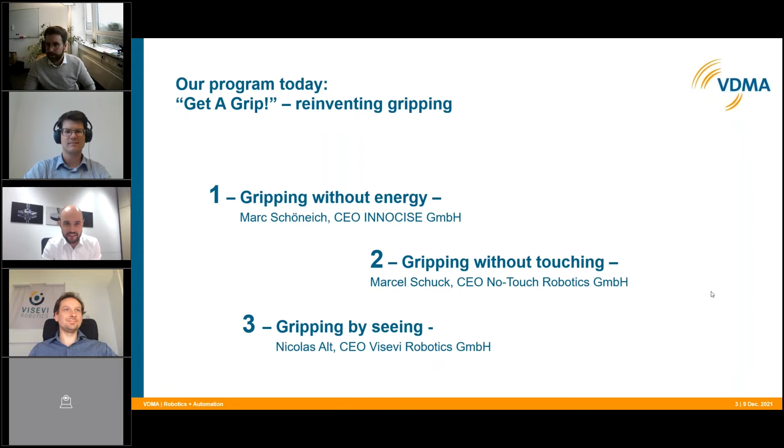Short introduction. My name is Marc Schöneich, CEO and founder of INNOCISE, and I'm quite happy to join my lunch with you today, and with a really nice topic, of course, gripping without some stuff and gripping with new stuff. So I thought about, when you speak about food like cheese, the new cheese is without any gluten, and it's without any palm oil, and it's without milk. So why not gripping without any energy and stuff like this? But of course with new features. I'm quite happy to share some insights with you today.

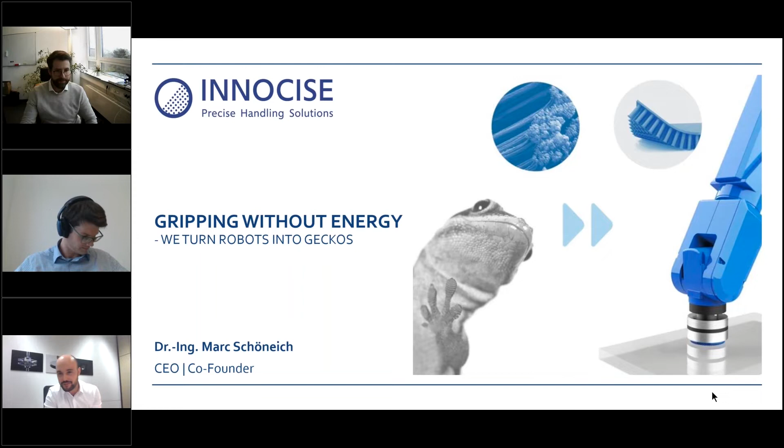Speaking about INNOCISE, we have gripping without any energy, and we turn robots into geckos. And when I'm eating lunch, I like to watch videos or sometimes read mails. I just want to share a video of what we are doing, to give you an insight into what's happening at INNOCISE. I hope this is working. I try to put the music behind. Just give me a sign if this is working. Okay, here you go.

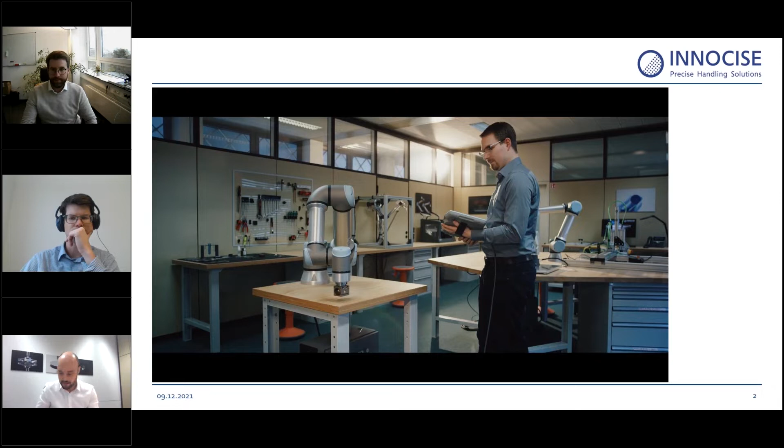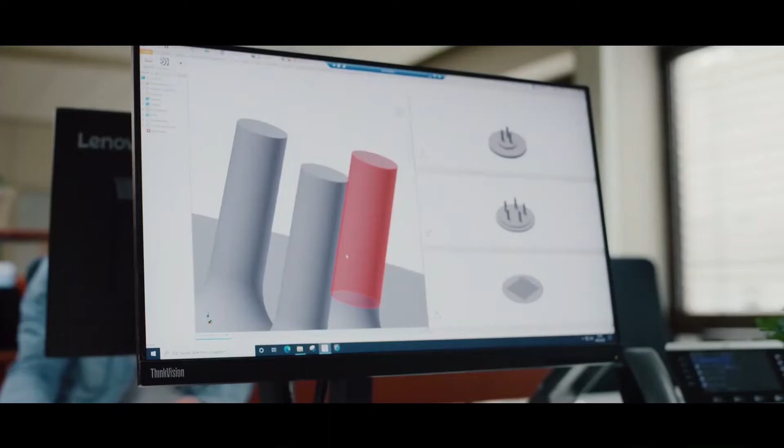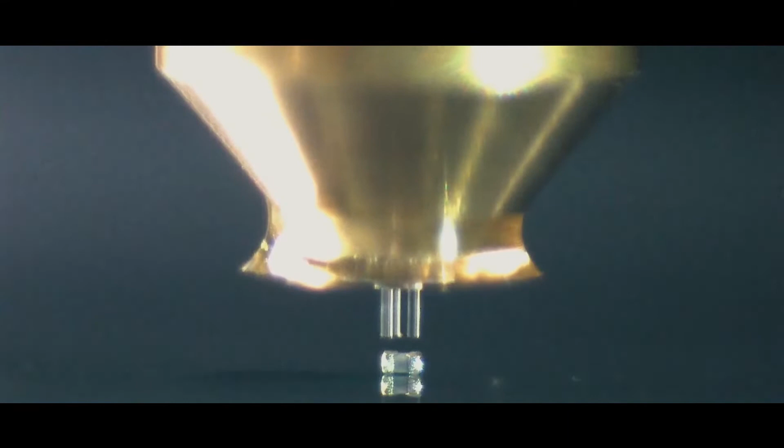We live in a world of materials. These materials appear in different forms, sizes, and shapes. At INNOCISE, we take on the challenge of handling the most sensitive, tiny, or demanding components. We develop gripping solutions to automate currently impossible or cost-intensive processes. More than 10 years of research at INM, Leibniz Institute for New Materials, built the foundation for Gecomer, a bio-inspired technology based on the function of gecko toes. Blending science and engineering, we move parts below 10 microns, pushing the limits of microassembly. Fast, precise, and sustainable. What applies to our team also applies to our technology.

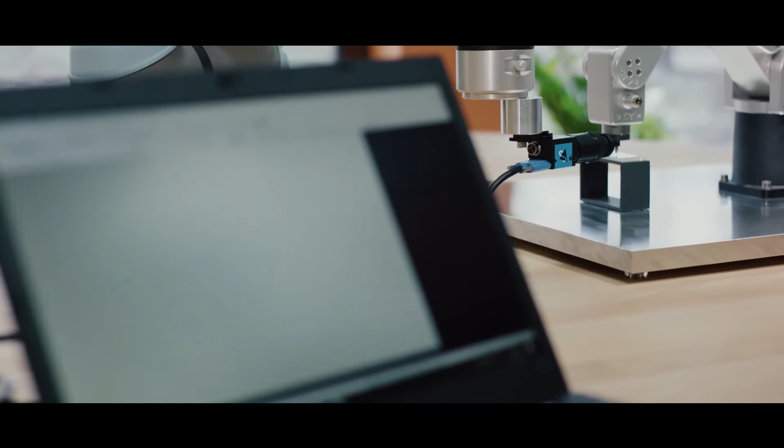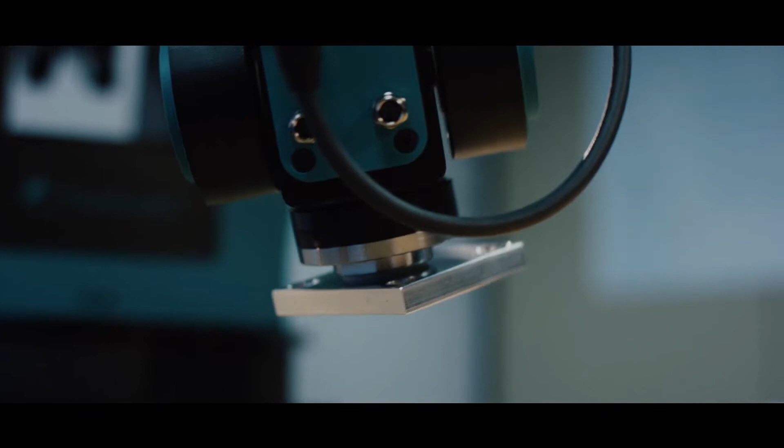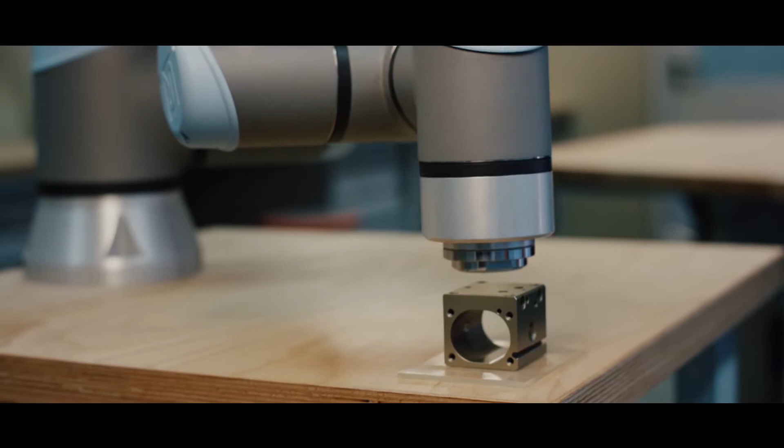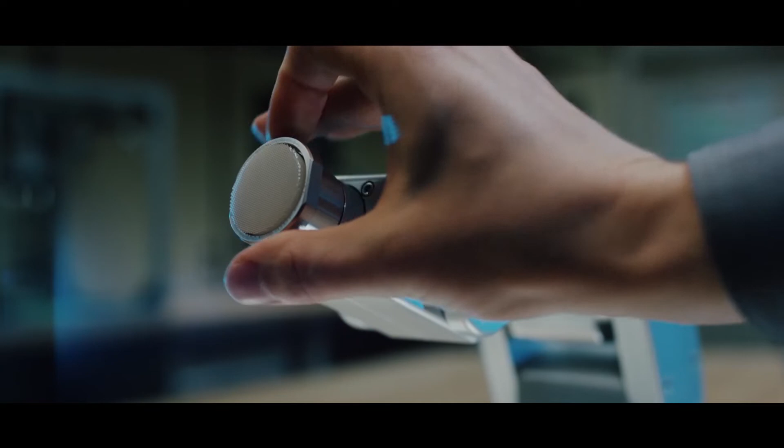Take a closer look. Our customers save valuable resources and costs as our grippers perform without external energy. We partner with well-known companies to combine innovative technologies with the highest industrial standards. This synergy brings a disruptive change to the handling of sensitive components. Easily adapted to different systems, the technology makes a key contribution to ecological, social, and economic progress. Once installed, the lightweight gripper operates noise-free, improving working conditions for collaborators. The structure increases quality and reduces scrap rate, as the flexible pillars do not leave any scratches or residues. Our specialists push the boundaries to best meet the market's needs. Based on physical van der Waals forces, attachment and detachment does not involve magnetism, chemical glue, or suction. The bio-inspired material paves the way for pick-and-place applications under extreme conditions, such as high temperatures or even vacuum. INNOCISE is the next step towards sustainable production.

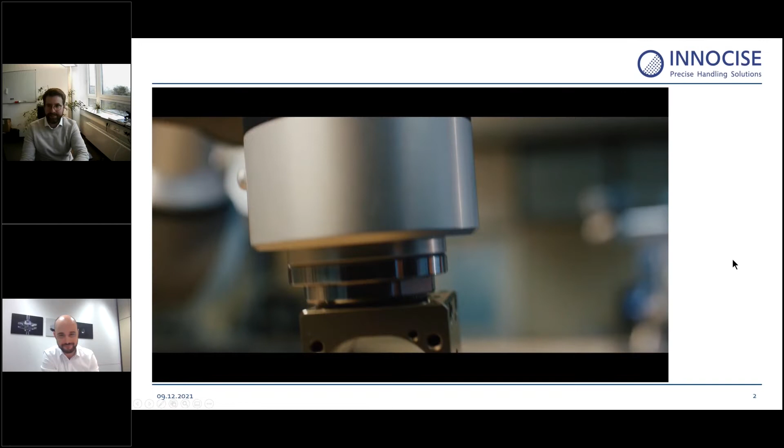So gripping without any energy, how does it work? You'll see it in the video a little bit. At Innocise, we are not building robots. We are not building grippers. We are building the fingertips of robots with grippers. So pick and place for us is working by microstructured polymers. We are experts in polymer technology and microstructures to create this adhesion force by using van der Waals interactions with about 1 kilogram per square centimeter, and we detach it in like a second. We can detach it with quite an easy detachment mechanism, like the gecko is doing as well.

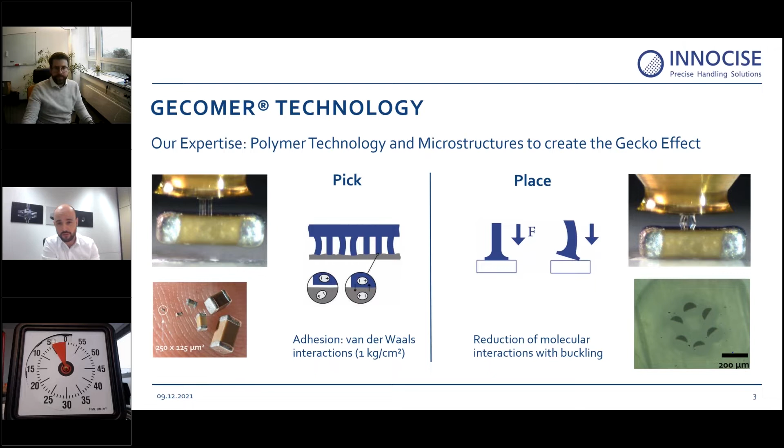I already showed this slide at the VDMA Maschinenbau-Gipfel in Berlin. So my motivation is, well, of course we can reduce suction grippers and stuff like this. But when we look at this modern production site for batteries, for example, our motivation is to rule out the entire blue cables here. So everything which is suction cups, stuff like this, is quite important for us, for a sustainable future regarding machine building and gripping, of course. And at the same time to challenge new environments for gripping, like automation opportunities in clean rooms or vacuum production as well. This is working from really small parts to square meters.

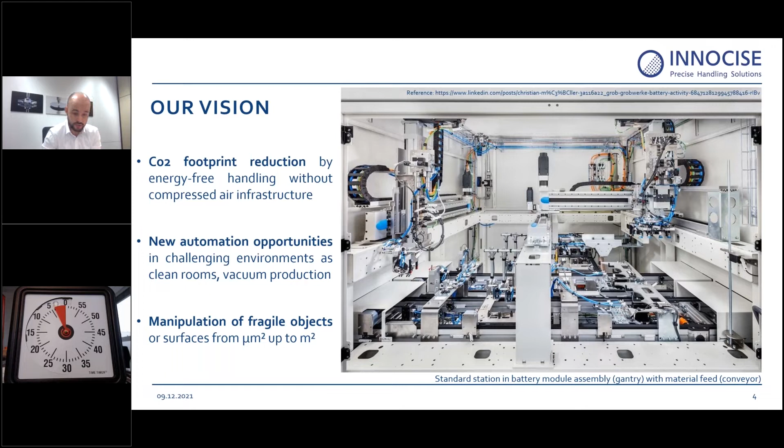So I don't want to bother you with some sales slides. So we have just a nice slide where you see some pictures, but generally it's about cobots, of course, which we can equip with our technology. You see here, production automation. We have a standard product which is sold by Schunk, so we have a really good partner regarding applications here for a standard product. This is called Schunk ADHESO. We won some prizes as well, such as the German Innovation Award.

What is kind of interesting here on this side, we speak about micro assembly. So the smallest gripper which we built is like 10 times smaller than a human hair. So for new miniaturization applications, this is quite interesting, as well as for new LED pick and place options.

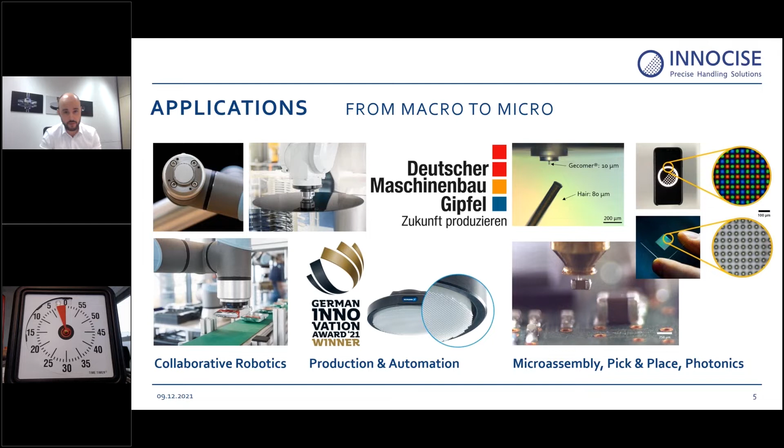I prefer to share 3 application cases with you, where we have really used our technology to push boundaries in production. So here on this side, we see the fuel cell assembly, where we use a gripper to handle parts where we need a gripper which is residue free, which is really handling fragile surfaces with a high cycle time at the end of the day.

In the middle here, you can see a device which is coming from packaging. This is from Schubert, so this is not a secret to speak about here. We have equipped the system with our grippers, avoiding blue cables, as I already mentioned at the beginning, which is leading to tremendous cost savings as well as CO2 footprint reduction.

And here, normally there should be a small video. You can see it's the handling of small parts, glass fibers for the manufacturing of quantum computers in the future. This is something where we are really deep inside as well, already handling this kind of parts, micro lenses, micro optics. Really interesting as well for this technology.

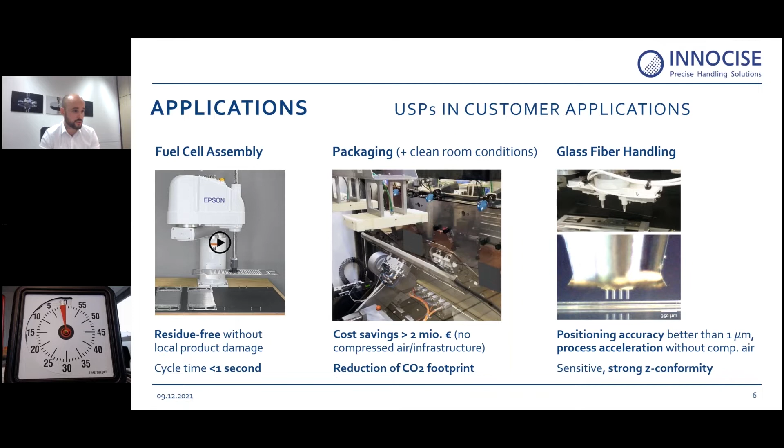And this is already it. So I prefer to have some chat or some questions. So you see our team for machine engineering. It's quite diverse, nearly 50% women, and we are always looking, of course, for new employees. We are now 2 years old, more than 20 employees, and growing every day. We are not looking for money. We are looking for customers. This is something new for startups, and of course integration, cooperation.

But as well, the most important thing here in this round is to speak about partners which have the same vision about CO2 neutral production, about microstructures, microtechnology, but as well AI. And I hope to learn something from the next talks, how to integrate, for example, camera vision in our systems. Thank you very much.

Yeah, thank you, Mark. It was a little bit quiet, this presentation, but maybe you can share the video afterwards, if it's possible. Yeah, I will share. It was quite new to try this platform, but I will send a link in the chat to look at the video once again. Okay, thank you. We are now ready for your questions. Let me see in the chat if there are any questions for you. I tried to increase the volume, Patrick, but I didn't know how to improve it. So, at the moment there are no questions, but I have one question for you.

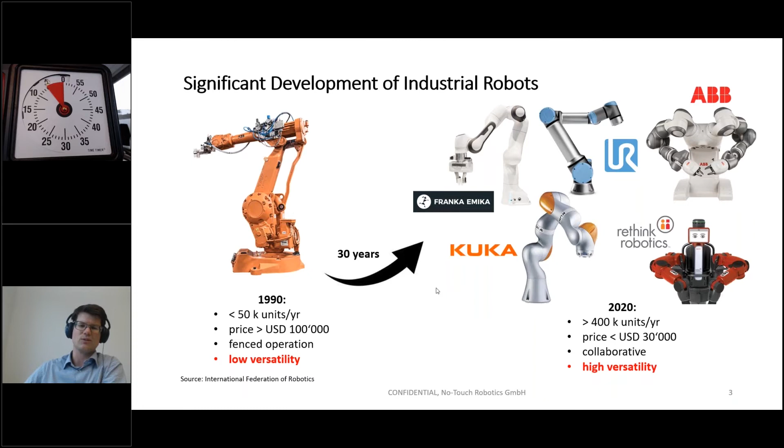As of July this year, we are about 8 full-time equivalents and growing, and as mentioned, we're a spin-off of ETH Zurich. To start with, and to give a short introduction of what we're doing and why we're here today for this lunch meeting: if you look at the evolution in robotics since the 1990s, you can see this drastic shift from robots being low versatility, very high priced, having to work in non-collaborative environments, to robots that can be used on a desktop, used collaboratively, massively going down in price, and highly adaptable to various use cases.

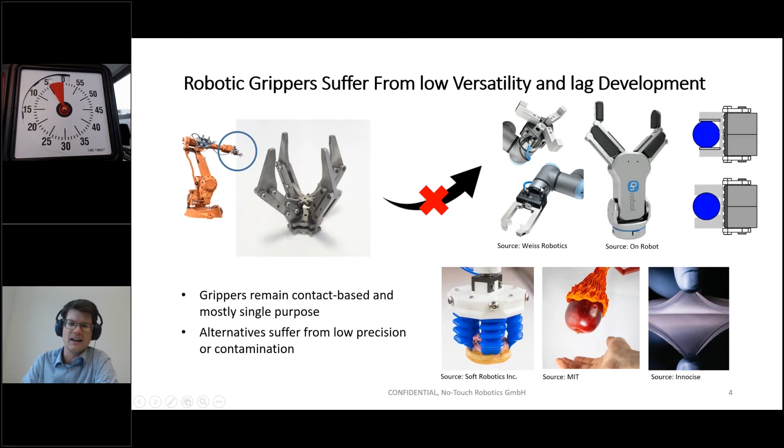However, if we look at what is on the front of the robot, the end effector, the gripper, we can see there has been some evolution, but leaving out highly innovative solutions, most robotic grippers rely on the fact that I need to generate a clamping or gripping force between a gripper and an object. For very small components, oftentimes the issue is that because in such a gripper I can only use parts of the object surface, even if I embrace them, I have high local forces and then gripping traces or residue accumulates on the surface. So we started out to create a solution for this.

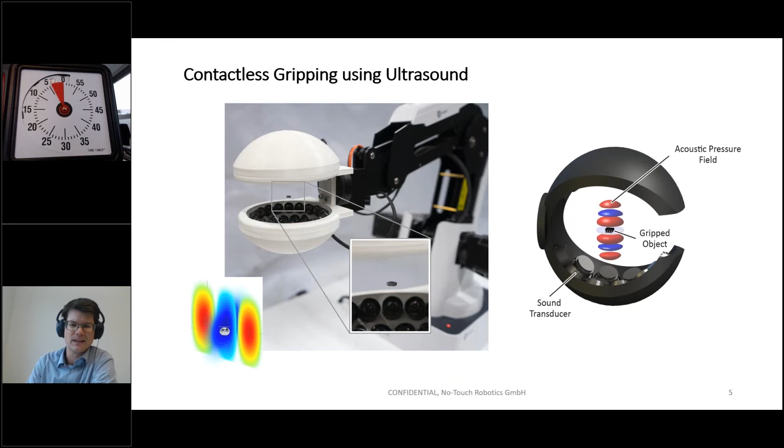So our core technology does not touch the part at all. You can see one of our earlier demo systems here. We have a robotic arm, and then this gripper here in the front that looks like two half sphere caps, and they generate an acoustic field in which the object is trapped in the middle of this acoustic field and is completely levitating without any mechanical contact. The way such a system works basically follows more or less always the same pattern: what you can see is we generate sort of an acoustic hologram here.

The shape and distribution of this acoustic field, and thereby the shape and distribution of the forces we can generate, adjust to the specific use case. We do this by having a system that consists of controls, FPGA-based power electronics, and an array of ultrasonic transducers. With this, we synthesize the field to the needs that we need, and we can not only do this in a static manner, but also dynamically.

This works for gripping applications mostly in air, but it also works in other media such as water, or we have a few use cases where we even handle single cells in suspension. To give you an overview, the forces we can generate with this technology are in the range from micronewtons to millinewtons. So this is something for very small, very fragile objects, not for big parts, but rather for small parts.

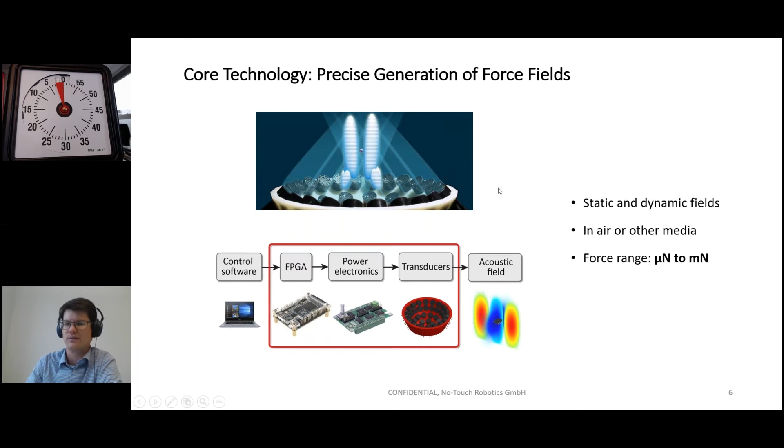Similar to Mark, to give you a brief overview of our areas of activity. Most of our use cases with this technology involve individual parts of really high value, mainly in 4 areas.

Optics is a big part for us. Then microscopy, where we even handle single cells. Micromanufacturing and semiconductor handling. Size-wise, this ranges from around 10 micrometers for cells—cells in the human body are usually between 20 and 100 micrometers—up to parts that are up to 10 millimeters in size.

You see an example here in this picture of a watch dial. Of course, a Swiss company has to do something with watches, where you can see how numbers that are ultra highly polished are placed on the face of a watch.

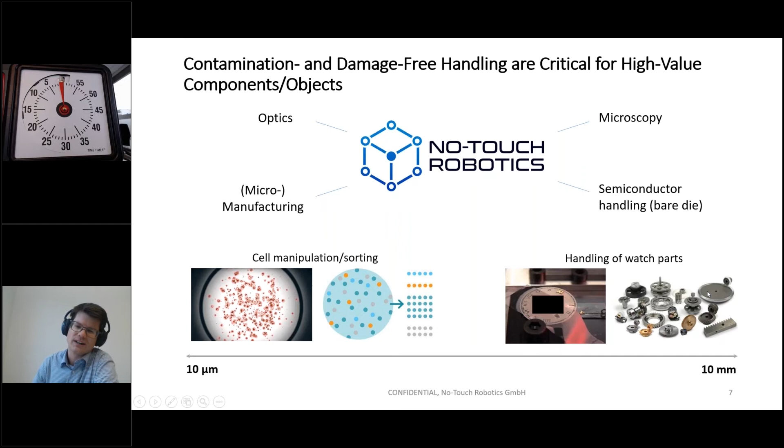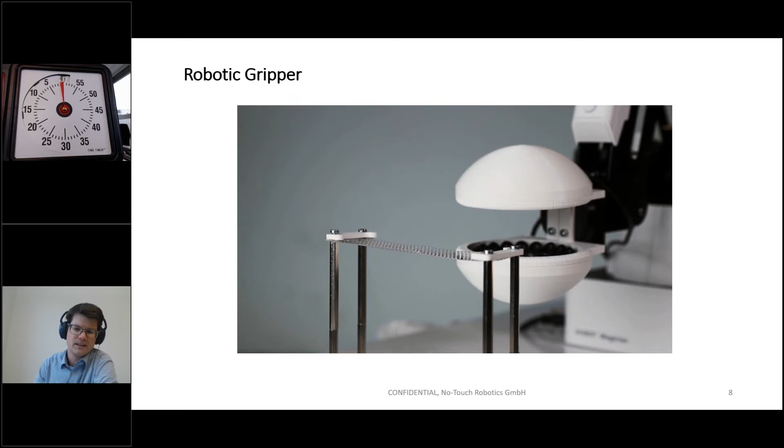Here I've prepared a short video, I hope it works. What you can see is a pick and place operation with a small watch part. The gripper approaches this grid structure, which is an acoustically transparent surface. The acoustic field is activated, and by this the part is picked up. If we want to place this part again, we just do the same thing in reverse.

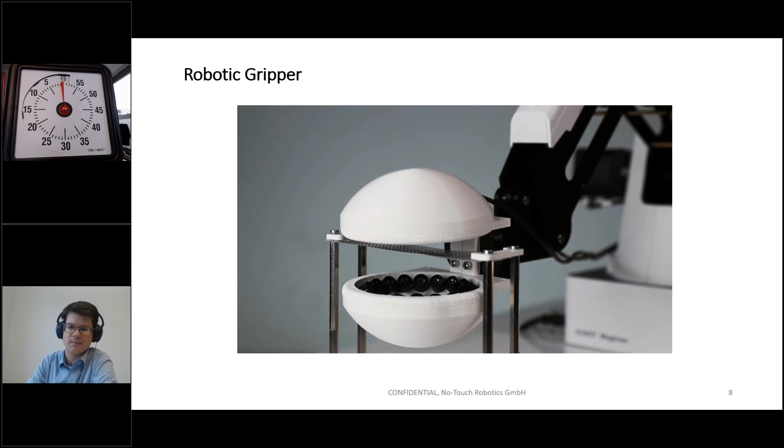Earlier I promised you that we can also do dynamic fields, so here's a video of this. This is a simple demonstration with a piece of styrofoam, but you can imagine other particles here. We levitate the part in the acoustic field, then adjust the pressure distribution so the object is translated horizontally and vertically. We also have systems where we can even control the rotation.

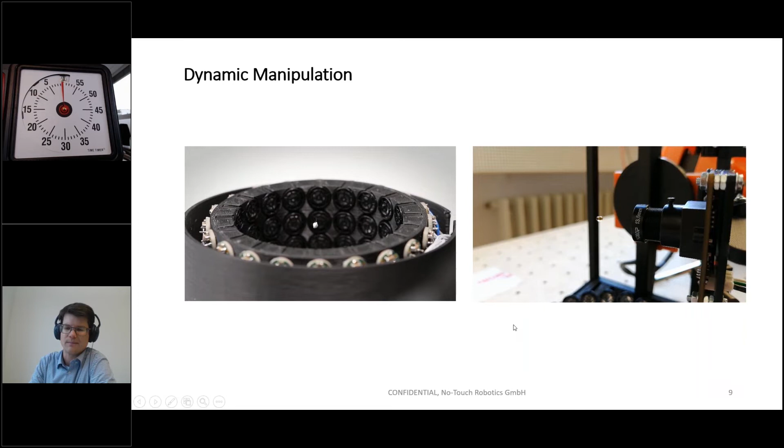As there is no mechanical contact between the object and the gripper, we can of course also do this for liquids. You can see a small liquid droplet being levitated, and this is one of the cases where a camera looks at the object and we can do closed loop control of the position. We can dampen the vibrations—we have a lot of possibilities in assembly and control of this object.

No Touch Robotics started a bet with a space project here in Switzerland that we could manage to levitate a particle throughout all phases of flight—the launch, the zero gravity zone, and up to the point where the parachute opens for slowing down the rocket on landing. This actually worked: the particle was stably levitated through all these phases. The forces were too low only once the rest of the rocket hit the ground.

Can machining be carried out during the gripping process?

That depends on what kind of machining it is. What we have done in the past is, for example, built a clamping mechanism for laser milling. So that works.

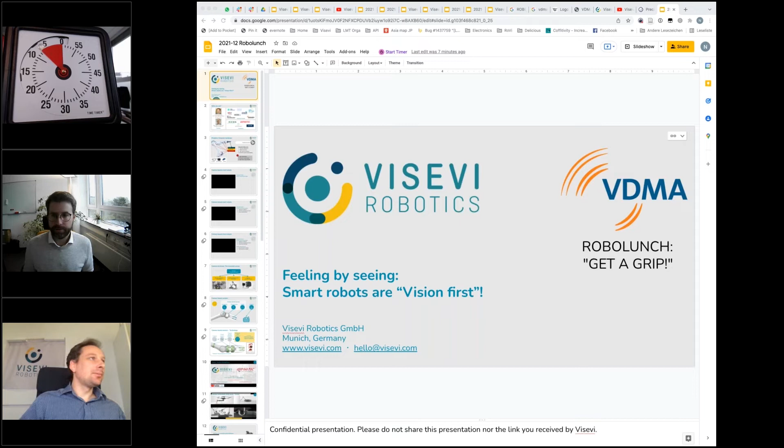And change somehow? No, no, it fits perfect. All right.

Feeling by seeing, grasping by seeing, that's the topic of my presentation. I want to explain why smart robots are vision first.

Visevi Robotics is also a spin-off from TU Munich, based on 5 years of research. In our research, we asked how we can improve the perception of smart robots for grasping with haptics and vision. We learned that what an intelligent robot can really do depends on what it can see and understand from the environment.

We thought, doesn't the camera become the essential sensor of a robot? And can it not be used for many applications at the same time? I teamed up with Stefan to build such a robot, from the hardware and software, and this is how we started with Visevi Robotics.

There's a bit of context here. An industrial robot is built with the concept of mechanics first in mind, with very precise gears and rigid structures. But if you add intelligence and sensors, you end up with a complex system, especially for the hardware. You need wiring in very small spaces, leading to high costs and high weight.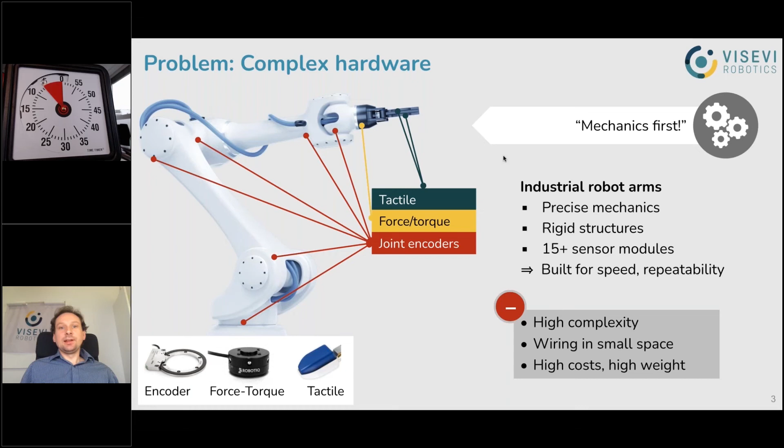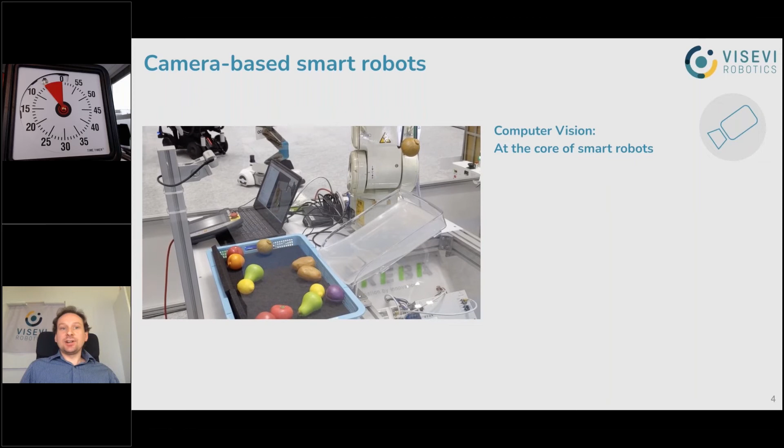A typical camera-driven robotics application is shown here: bin picking with changing, undefined objects, such as these vegetables. Before the robot can do anything, we need to find the objects and grasp them at the right location using camera and computer vision. What the camera really does here is object detection, detection of grasping locations, and scene understanding, meaning where the bin is and so on.

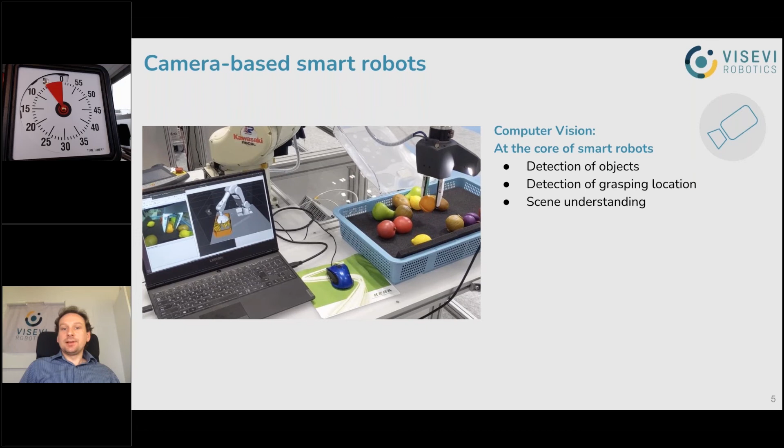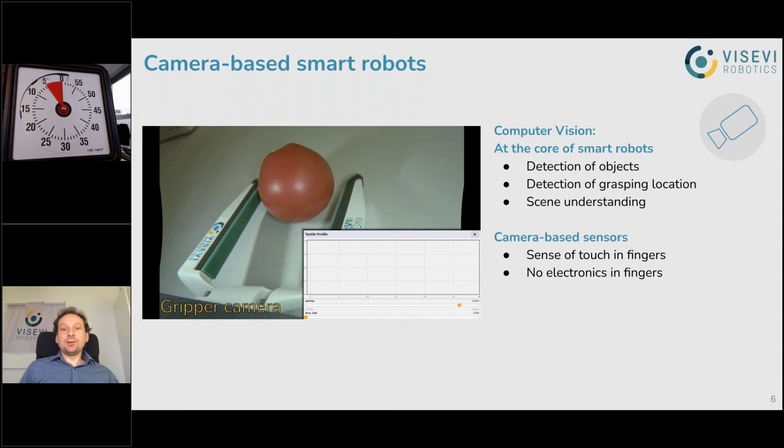But we go even beyond that at Visevi Robotics, with the concept of camera-based sensors. Camera-based sensors give you a sense of touch in the fingers without adding electronics and wiring to the fingers. Here you see a tactile signal of grasping this tomato, but I will explain this more in depth later in my presentation.

So why does the camera become the essential sensor? It's already used nowadays for seeing and understanding the environment, but it can also simplify mechanics, retrofit existing mechanics, and replace other hardware sensors.

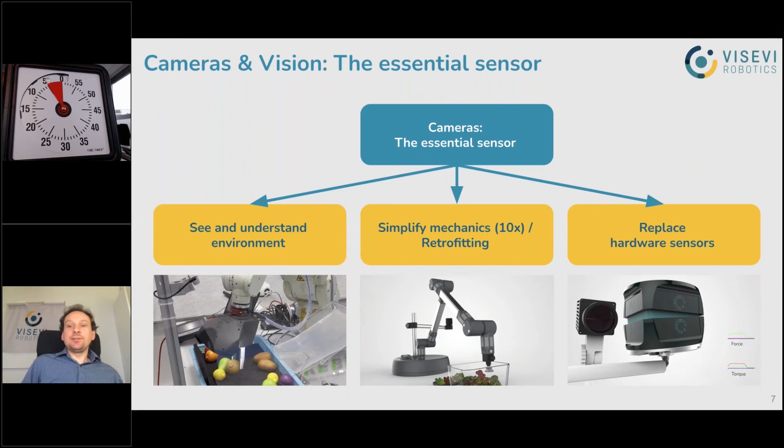The sensors you need on a smart robot arm are joint angle encoders, which give the position of the robot arm, force torque sensors in the wrist, and, for sensitive grasping, tactile sensors in the fingers. These are the three main sensors you need for a sensitive robot arm, and that's what we can realize purely camera-based with computer vision.

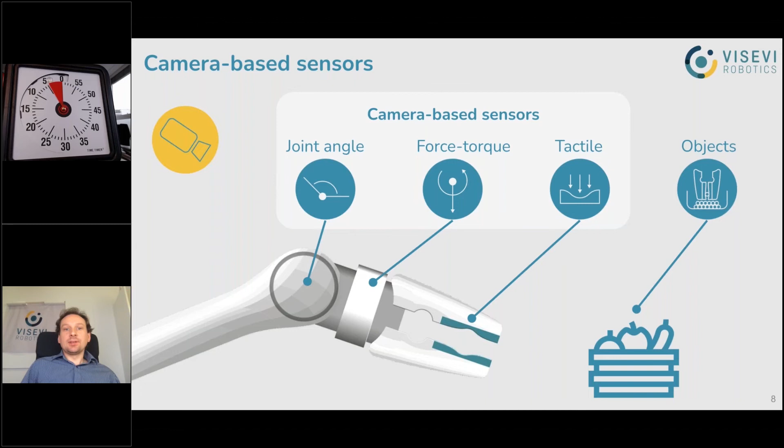In this slide I want to explain a bit more about how this works. We have a camera on the robot which looks onto the gripper itself, pretty much like we humans do with our eyes when we grasp a cup or something. This camera is connected to computer vision software for image understanding. Now we employ a simple yet effective trick.

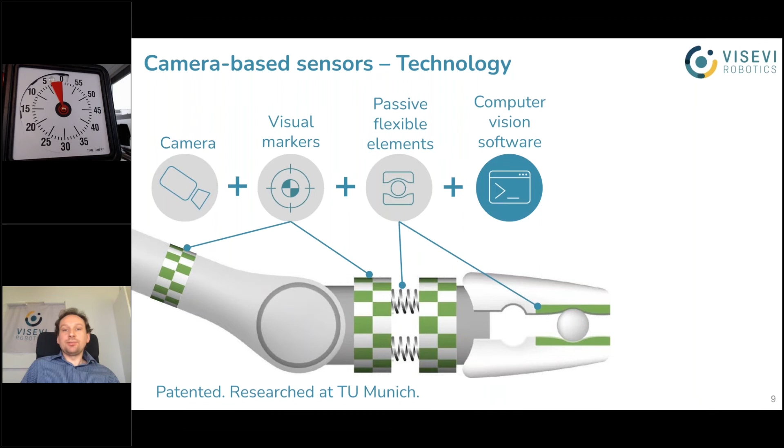We add passive markers onto the robot arm, the gripper, and elastic elements. Passive means there are no electronics in these elements, making them low cost, lightweight, and mechanically simple—exactly what you need to reduce mechanical complexity. By looking at how these elements deform using the computer vision software, we can realize a virtual software sensor that replaces numerous hardware sensors on a robot arm.

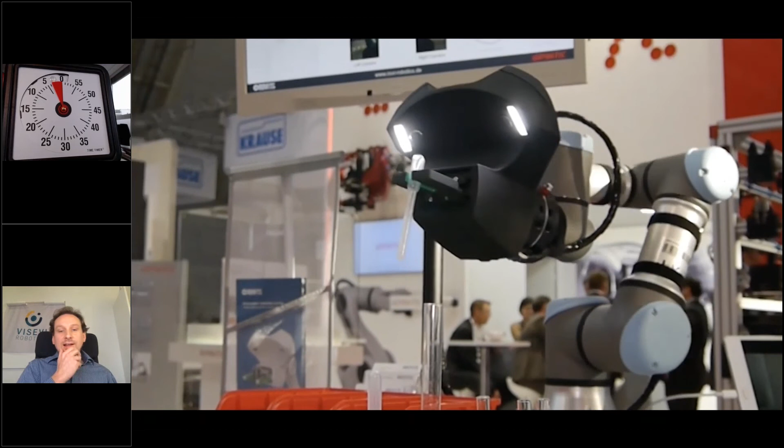Now we want to talk about grasping. I want to show you a little application we did together with Gimatic, about sorting transparent objects—glass and plastic—based on tactile signals. They are taken from the white tray and put into the red box.

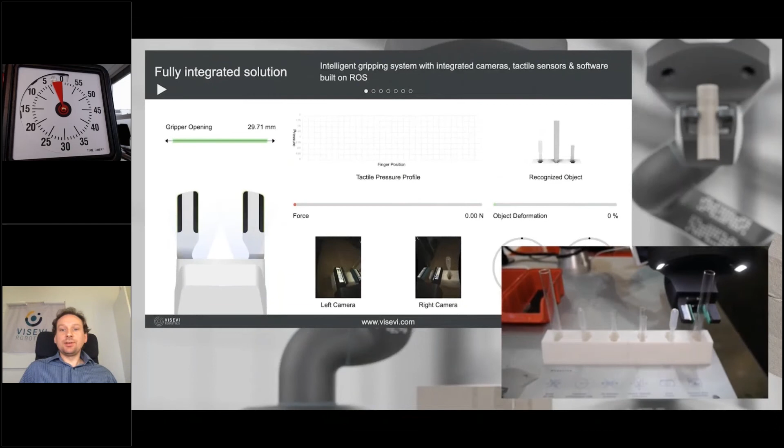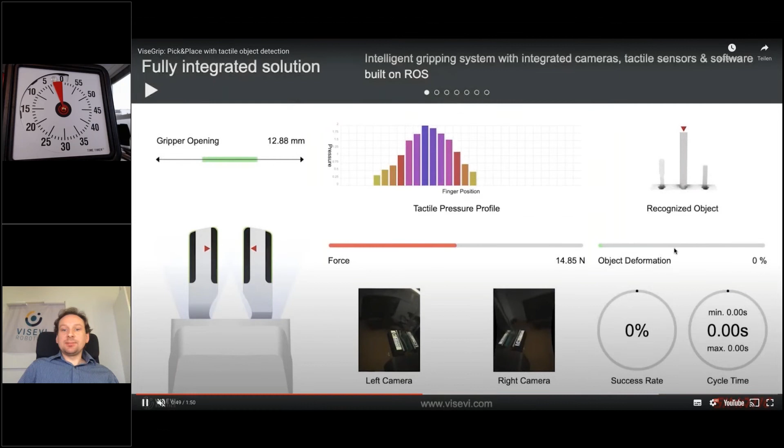Here you see again how this tactile profile looks, the pressure distributed along the fingers. When grasping this round glass object, you clearly see how the signal distributes. Now, in this instance, we grasp a soft plastic object, which actually deforms while we grasp it. That's something we can see with a tactile sense, and we can distinguish this plastic object from a hard glass object and sort it accordingly.

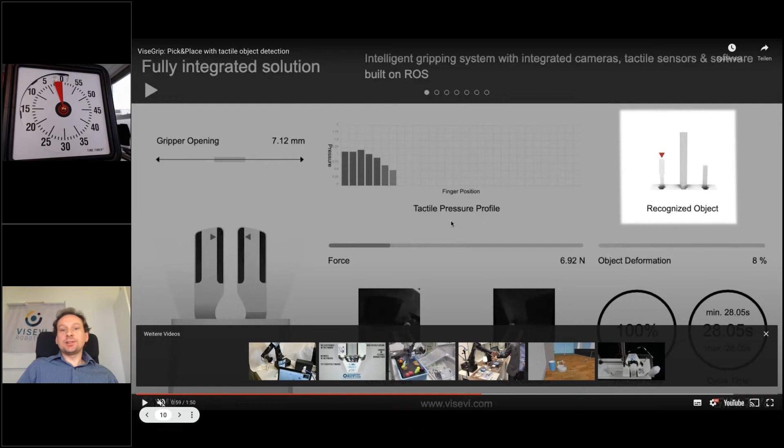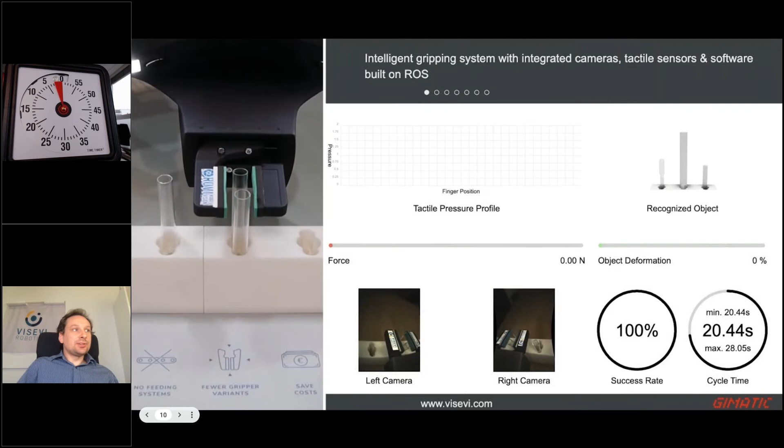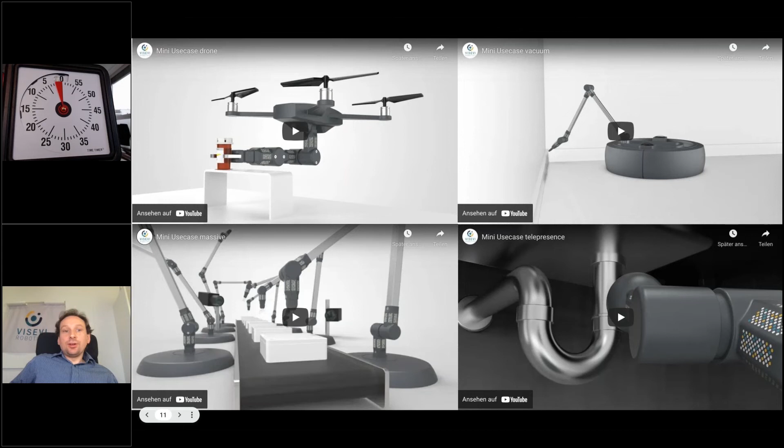I also said we can simplify the hardware of robots, and this enables, in our future vision, novel applications of robots. For instance, think of drones that do delivery applications. They already have a camera, often for navigation, but they lack simple manipulative skills. So why not equip them with a lightweight, simple robotic arm to place items?

Or in home use cases, a vacuum cleaner that can clean into corners and also pick up your left socks or toys could be very helpful, right? But in this case we need a really simple robot arm, which may cost only around $20 to $30, and we can do that by using the existing cameras those robots already use for navigation purposes.

In Industry 4.0, we can think about mass production for individualistic items, and telepresence for maintenance operations at home and in offices.

With that, I would already like to conclude. As a startup, we are always looking for innovative pilot customers. We offer camera-based sensors for intelligent grasping. We have a bin picking software that we can combine with those sensors for flexible bin picking. And we offer development services in ROS and robot vision. You can contact me by email, on our website, and via LinkedIn. With that, I would like to conclude and thank you for your time.

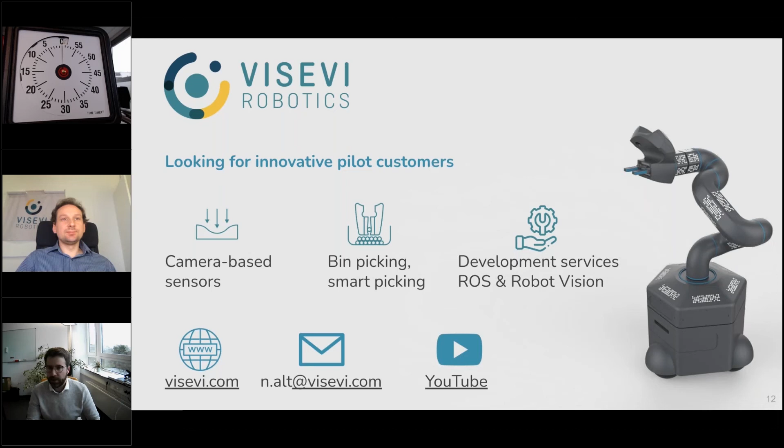Thank you very much, Niklas. Very impressive solutions you've shown us. Now the participants have the opportunity to ask some questions in the chat. There's one question: since you mentioned Industry 4.0, how do you plan to connect to the higher layer of the automation pyramid, MES or ERP level? So I didn't understand - how do you connect to the higher level of warehouse automation? Or right, how do you connect your gripping system with the higher layer systems like an MES or ERP system? Do you have an interface, or do you use maybe OPC UA for this connection?

So our philosophy is that we have our product with open interfaces, defined even in an open source sense, to make it possible for any system to interface with us. Now, of course, how we bridge into interfaces of existing systems, in that case we will need to establish the interfacing. We have not done that so far. So far, we have used other open interfaces or HTTP-based APIs to interface with our system. That is something, a software module, that we would add as customer-specific development.

Good. Can slipping of the object be detected if the gripping force is not sufficient? Yeah, that's exactly one of the strengths of tactile sensing. You can actually see when the object starts to slide out and even increase the gripping force to prevent it, or at least you can document this failure so you know that you haven't picked something.

Okay, and do you use several cameras for all these jobs, or is one camera enough? One camera can be enough, even to cover the scene, the object, and the gripper with one camera. In that case, you would probably use a wide-angle lens and a high-resolution sensor. Our algorithms are flexible - they can work with one camera or several. That depends a bit on how your workspace and your robot is built up.